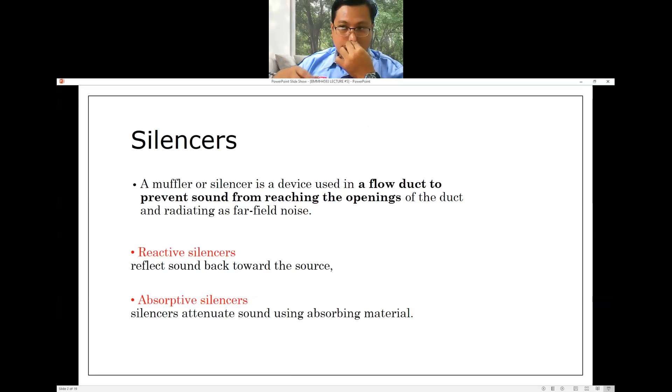Reactive silencers reflect sound back toward the source. When the source of the noise is the action, the reaction from the silencer is to reflect the sound back toward the source. But it's not only reflection, it can also be absorbed by the material. The material itself has the capability to absorb the vibration, and the vibration will not be transmitted to other mediums, solid or fluid. Absorptive silencers are silencers that attenuate sound using absorbing material. So we have two systems here: reactive silencers and absorptive silencers. Absorptive silencers focus on the capability of material to absorb the noise.

Absorptive silencer. Like I mentioned before, silencers are divided two ways: reflective and absorptive. So we go to absorptive silencer, which uses a sound absorbing material in which sound energy is converted into heat, mainly by a viscous process.

So actually we can convert this wave into heat. It's not only for noise, we can convert other energy into heat too. For example, noise, but also mechanical or electrical energy can be converted into heat.

Typical sound absorbing materials used are rock wool, glass wool, and plastic foam. Actually, in the muffler itself, it's divided into certain absorptive materials, so we can propose fibrous material.

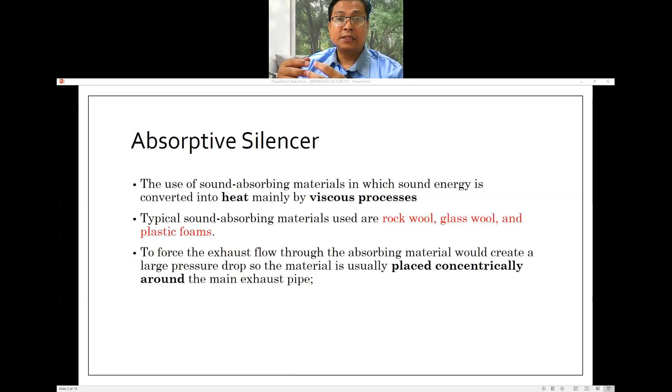This is called the structure of the silencer with the exhaust system. We can see where it's put in the duct system or piping system. If you notice, same thing like the exhaust system in a vehicle, they also have a hole in the piping to allow the gas to go through from the piping to the outside system, and then it will be absorbed by the silencer system. You can see the structure is constructed by a fiber system, and other absorptive materials you can choose.

Here they construct it with steel wool, and another one is mineral wool. Before that, they have a hole to allow the gas to go through, and then it's absorbed by the absorptive material. The design is based on the distribution of noise from the hole, and then it will be distributed. They describe the distribution with a mathematical calculation system, and they try to create an equation to calculate how much can be absorbed.

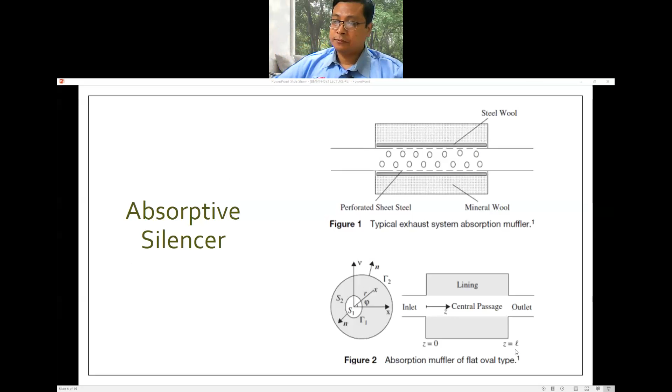So we go to reactive silencer. The other physical principle used is the reflection of sound, which is caused by area change or use of different kinds of acoustic resonators. Actually, I already mentioned this in the previous class. They create the reflection by using geometry. Maybe this one will be used in the room in the application, and then they will reflect the wave, and then it will go to the outside environment, and we can direct this wave the other way. These types of muffler are called reactive.

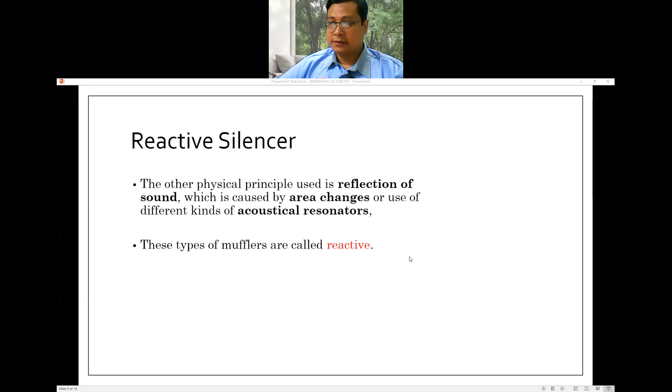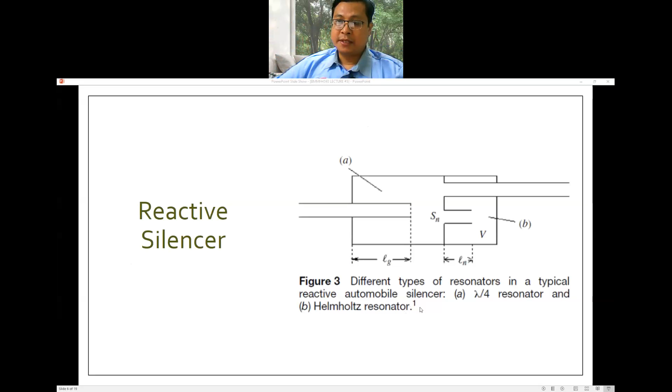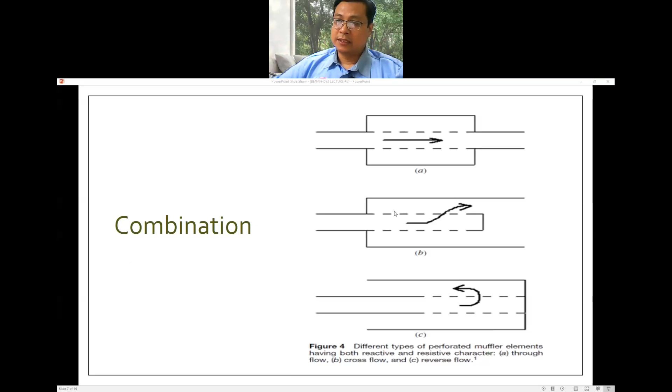So the reactive silencer you can design with several systems. Once you implement it, you can make sure the sound or noise will be reduced by the reflection. Sometimes corrosion makes a hole in the reactive silencer, and then it will create big noise for the vehicle. Sometimes you need to replace the silencer with a new one because of corrosion. So the system reflects, not only a straight piping system. They try to get the reflection inside the system, and then the sound will reflect back to the source direction.

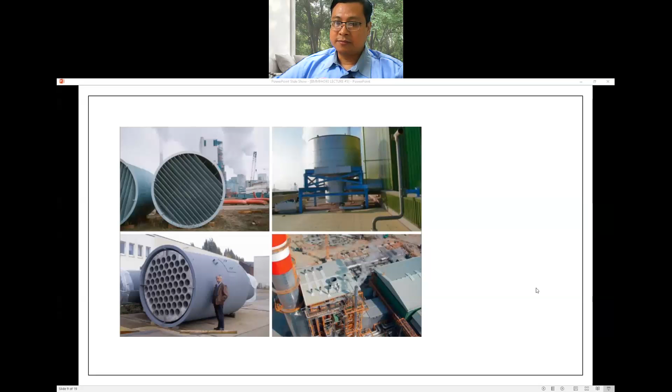Okay, this one is what I mentioned in the previous slide, the reactive system, so you can see the piping inside the reflective silencer. It's not direct piping, but they create one system here, and they absorb inside by creating many holes, and other holes transmit the exhaust. So the direction of the exhaust is from this way, they make the sound reflect inside here, and another side of the piping transmits the exhaust. This hole allows the fluid to flow outside to the outdoor system. Before we release to the outdoor, they create the reflective silencer.

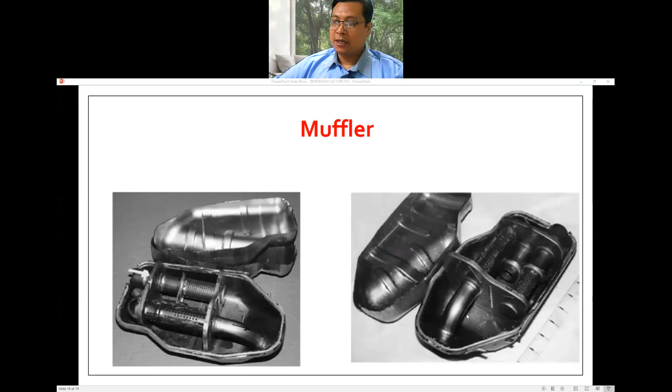So we go to car muffler. Is it reactive silencer or absorptive silencer or both? Actually, this one was already answered in the previous slide explanation. So you can rewind my video to answer this question. I don't want to answer here, so please find it by yourself.

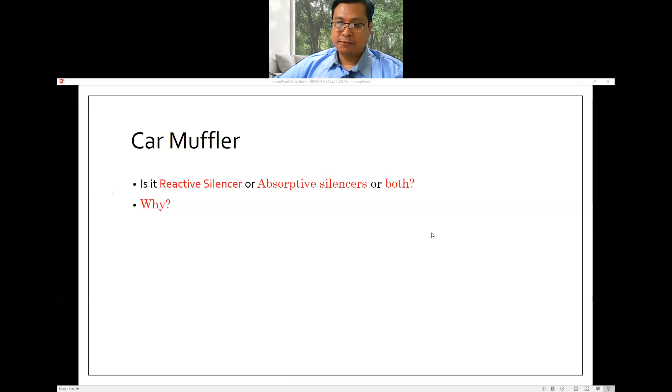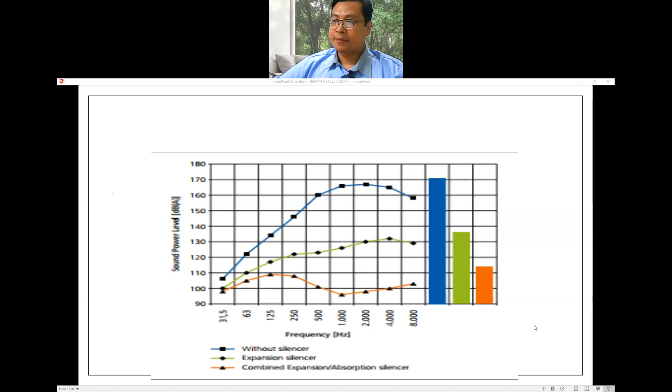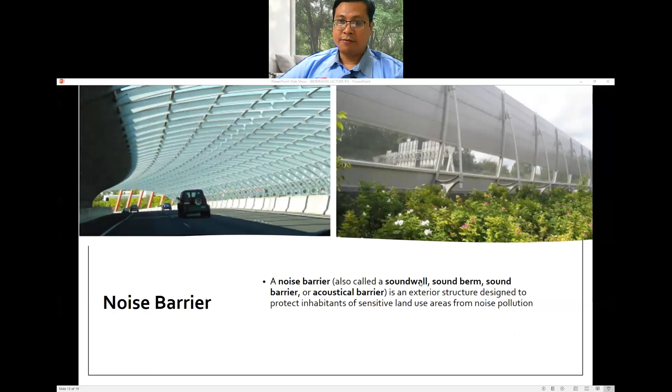Noise barrier: a material provides a barrier to the incident sound energy when it reduces the amount of sound energy that is transmitted through the material. So back to lecture 4, before lecture 5, we already talked about the incident sound energy. We can call this the coming sound, and then it will impact the solid, and the reaction of the solid we call transmitted and reflected.

So we hope the noise barrier can transmit to the material, and then it will be absorbed by reducing the frequency. That's why we create the noise barrier structure. We hope the transmitted sound will be reduced compared to without the noise barrier structure. There are a number of factors that affect the amount of sound transmitted through the wall, including the type and thickness of material, frequency of the sound, and quality of the construction.

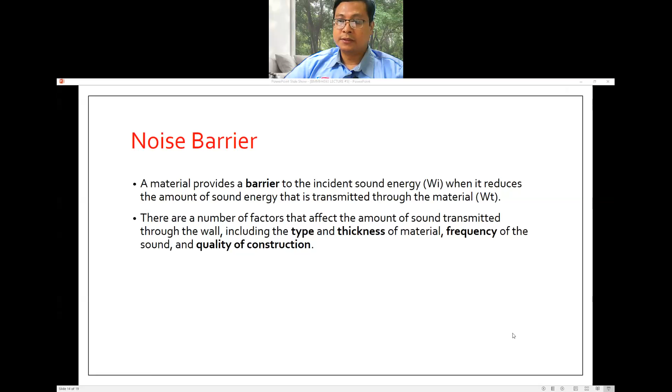Noise barrier materials: materials that are dense, such as a masonry block or wallboard, or stiff, such as glass, are generally better at reducing transmitted sound than materials that are lightweight or flexible. So maybe in the future, we try to create a smart material that still performs well in absorbing noise pollution, but is also lightweight and has a long life for the application.

So for maintenance, we also consider it can be low cost, and also flexible. Not only lightweight, because in the application sometimes we have a space issue, and this material can solve the space issue because the material needs to be flexible in geometry, because flexibility gives it the capability to tolerate difficult geometry.

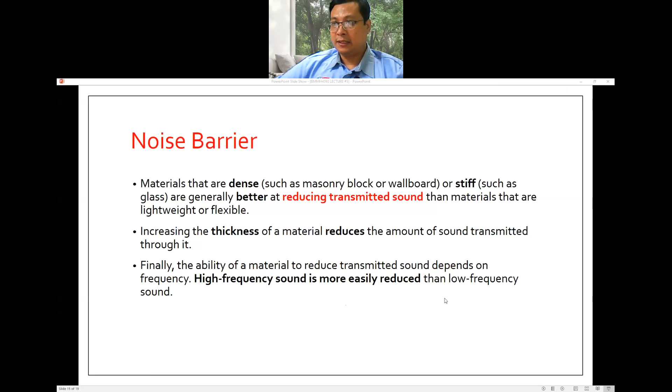And then finally, the ability of material to reduce transmitted sound depends on the frequency. High frequency sound is more easily reduced than low frequency sound. So we hope we need to implement this for high frequency pollution. Still, noise barriers are the most effective method of mitigating railway and industrial noise sources, other than cessation of the source activity or use of source control.

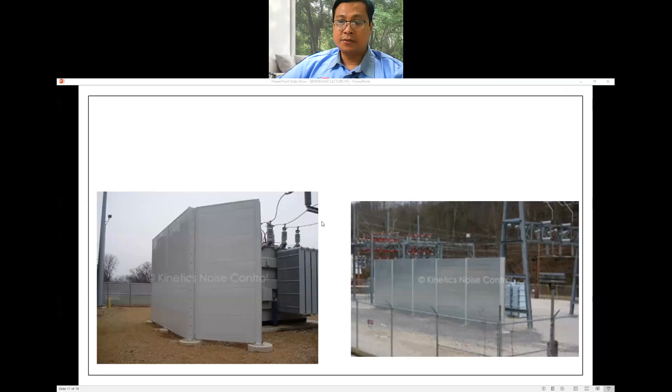Okay, this is an engineering application of absorbing. Around electric power transmission, they have a big transformer that makes a big sound, and they try to absorb that noise, so they create a barrier around there. So the engineers hope the sound cannot be transmitted to the residents around the industry.

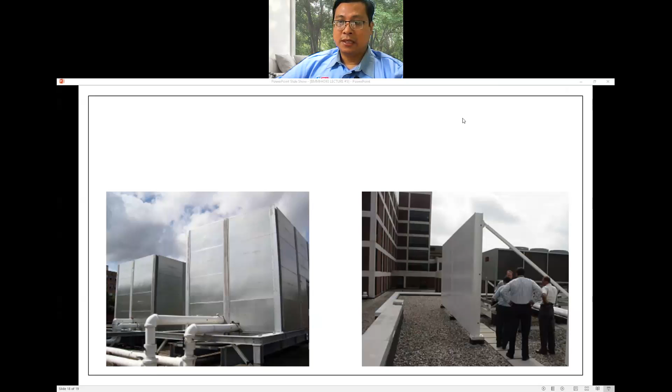So in the HVAC system they also have the envelope, the barrier structure. Maybe this structure is a rooftop HVAC system. So they have the package of the HVAC system, and they also develop the barrier to absorb the noise. Okay, that's all for today.